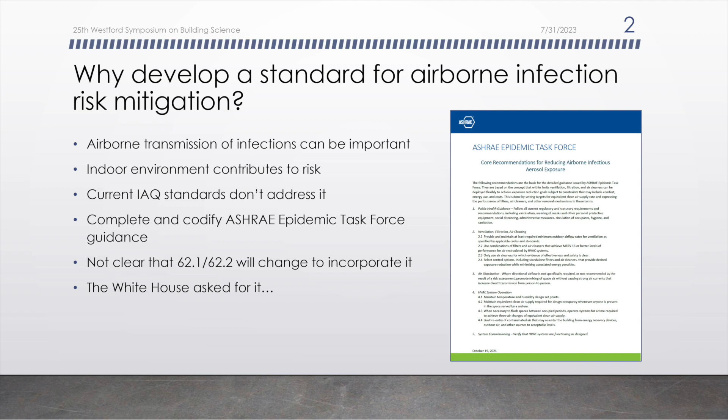events intervened. But so the reasons, airborne transmission of infections is important. We know that now after COVID. I was involved in some of those arguments with WHO through a group that was organized by Lydia Morawska from Australia. We know that the indoor environment contributes to risk of infection, and we don't have standards right now that address it unless we want to point to healthcare standards, and actually they don't do a very good job of it. We've come to learn by studying how their ventilation rates were determined.

In a way, this is the completion and codification of work that we started in the ASHRAE Epidemic Task Force, which I stood up in March of 2020, which now seems a long time ago. We didn't go beyond guidance to things that could be stated as minimum requirements.

And also, speed of ASHRAE. I think anyone's familiar with the ANSI code intended standards like 62.1 and 62.2 for acceptable indoor air quality. They move very slowly, and so it's not clear when or to what extent they might address infection risk mitigation. So that was another reason to do it. Oh yeah, and the White House came to ASHRAE and twisted the president's arm extremely hard to get it done, which was one of the main drivers.

So quick chronology, the White House really started taking notice of buildings and their role in disease transmission late in 2021. This was already getting pretty far into the pandemic. And then by March of 2022, the White House rolled out a program called the Clean Air in Buildings Challenge, which was a voluntary kind of program, but at least gave some visibility to IAQ, and EPA is taking care of that right now.

But then things got very interesting later in the year. I went to a meeting and talked about the need for a national model code for IAQ, and that was what really I was driving for. I spoke about it at a workshop that Johns Hopkins organized next to the White House in September. And then the White House itself had a summit a month later.

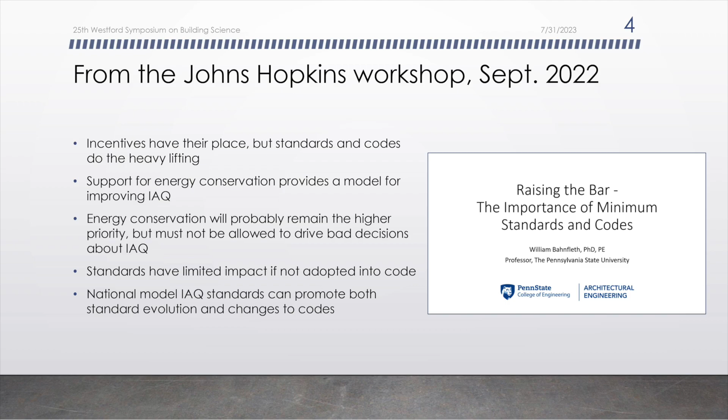These are the main points I made at the Hopkins meeting: incentives are great, like the Clean Air in Buildings Challenge, but a lot of times sticks work better than carrots. With energy conservation, there's good history showing that a national standard adopted into law, like Standard 90.1 for non-residential buildings and the IECC for residential buildings, causes synergies that lead to a lot of progress.

I think energy conservation will remain the higher priority in most people's minds, but we can't allow it to drive bad decisions about IAQ. The buildings are for people, not for saving energy, as Bjarne Olesen, my former ASHRAE presidential colleague, likes to say. Standards need to be adopted into codes if they're going to be effective. So the point was that we ought to be getting some kind of national standard, but I was thinking comprehensively.

In November, the White House came to ASHRAE, and that's when they asked us to develop a national pathogen control standard. I thought that was a great idea until they finished the sentence and said in 6 months. They really wanted it in place by the time the COVID restrictions ended.

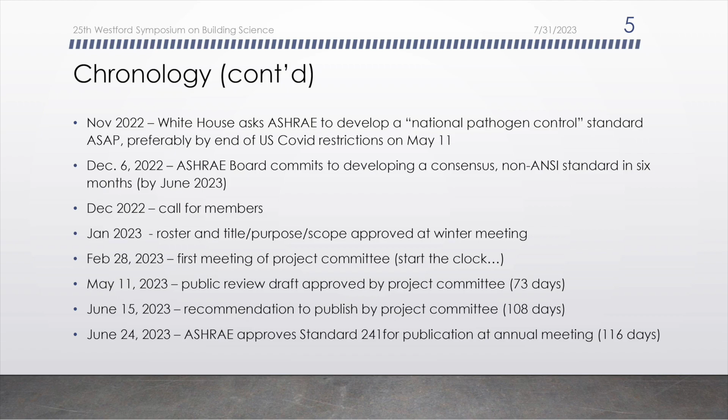I didn't realize that was actually the clock striking 12 for Cinderella, because at the end of that period, not only were the restrictions going to be lifted, but all those folks in the White House who were supporting indoor air quality and COVID response were going away. So they're all back to their other jobs now.

So in December of '22, the ASHRAE board said we'll do it, and we'll do it in 6 months. Then they went looking for someone dumb enough to lead the effort, and I raised my hand one more time. We did a call for members in December. In January, we got a roster approved and a title, purpose, and scope approved at the end of the winter meeting. We first started meeting to discuss the standard with the project committee on February 28th.

We had a review draft by May 11th, 73 days later, did a 2-week public review, addressed 1,000 comments, and voted on a publication draft in the project committee on June 15th, which was approved by the standards committee on June 24th. So it was 116 days of development time, probably 10% of what it normally takes to do a standard. We're very pleased we got it done at all.

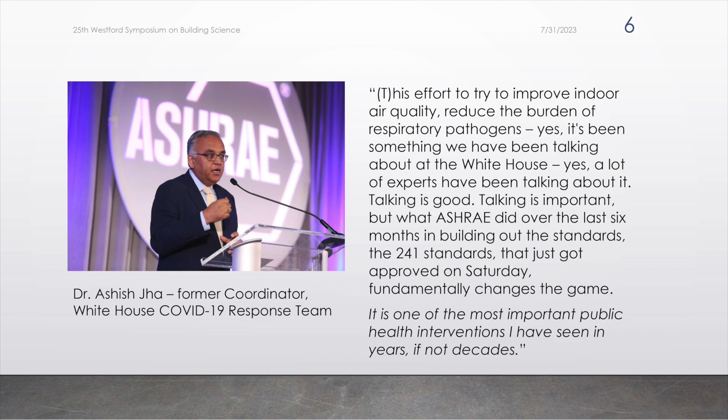We got some nice feedback from Ashish Jha, who came to Tampa for the meeting where the standard was approved. I won't read all of this nice stuff to you, you can find it on the ASHRAE website, but he noted in his remarks that it's one of the most important public health interventions he'd seen in decades. So I think this has the potential to be an important standard if it actually gets used.

Now, the thing that concerns me about all of those standards is that the part that gets adopted into the code is mainly just design and installation. So the operation piece of it is going to be a project for the future.

The way it works is by specifying a requirement we call equivalent clean airflow, which is really a kind of revolutionary concept from the point of view of standards, because instead of simply having standards that talk about outdoor air, we're now combining all of the controls into one metric, and you can achieve that metric by different means, as I'll note.

And because we were only writing one standard, we tried to shoehorn together non-residential, residential, and even healthcare buildings here. Healthcare is all integrated for the most part, and there's one separate section on residential.

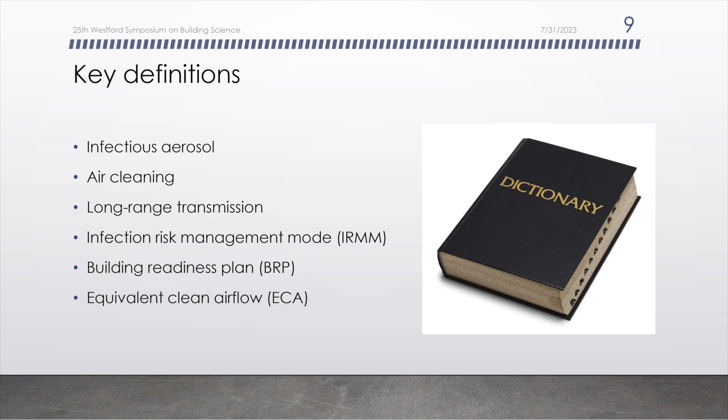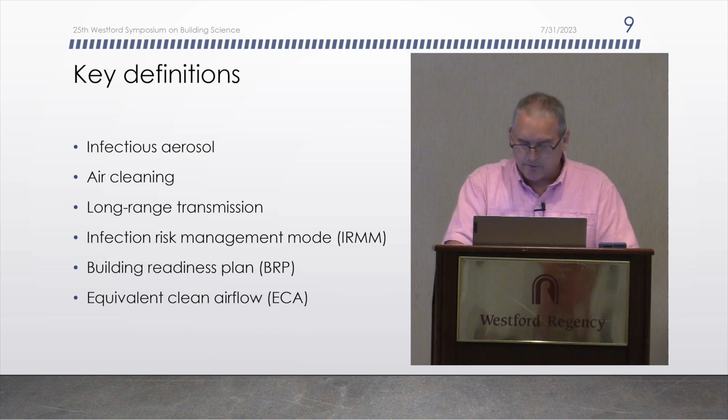So the key definitions I'll talk about a little bit: what is an infectious aerosol? What do we mean by air cleaning in this standard? Long-range transmission, which I've already touched on. Infection risk management mode in a little more detail. And the building readiness plan, which is a really important document that comes out of applying the standard. And finally, equivalent clean airflow, this thing that we want to achieve.

So I won't beat this to death, but again, long-range transmission just means you're not in that radius around an infector where you're likely to get hit by droplet spray or be in their exhaled plume. So probably in the same room, but breathing a concentration of infectious aerosol at the average concentration of the room.

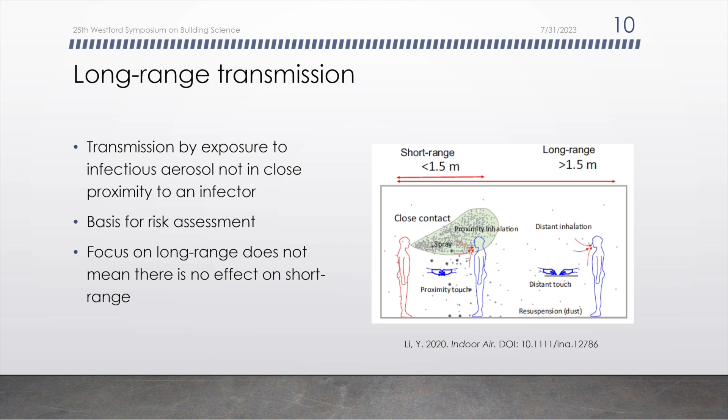So this is what we're really trying to control - those particles - by various means.

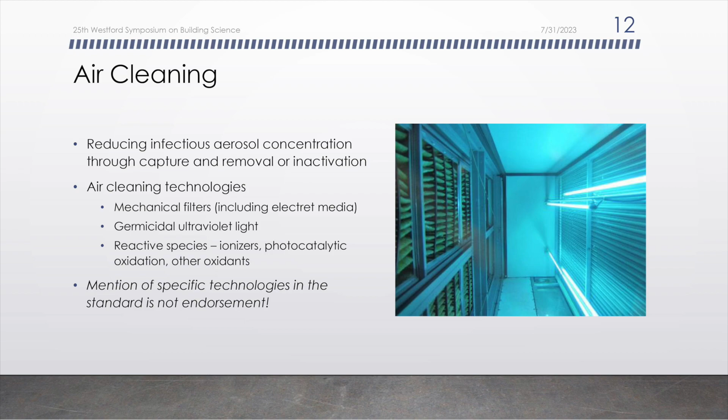Air cleaning is anything we do besides dilution ventilation to reduce concentration. So it can be actually removing particles with some kind of air cleaner, or inactivating them with technologies like the UV you see in the room here. So mechanical filters, germicidal light, and reactive species are all possible ways of complying with this standard.

I think we've gone a lot farther toward defining how that can be done. I want to note that mentioning specific technologies in the standard is not an endorsement - we're simply making it clear what kinds of things we're talking about. There is no ranking of controls in the standard.

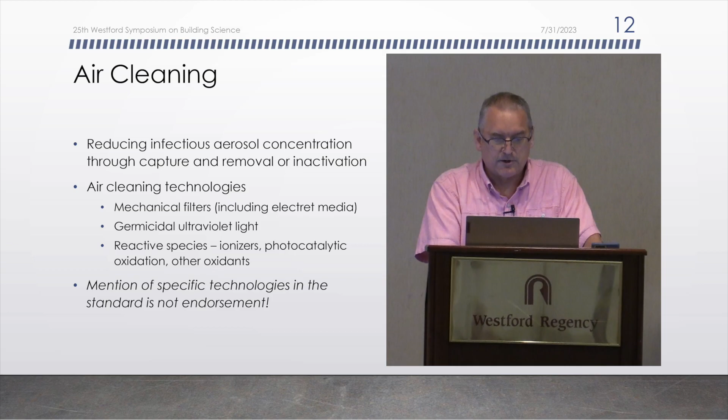So infection risk management mode is a period when there's perceived to be enough risk that we would want to put additional controls in place. That requires a decision maker to make that determination.

It could be a public health official, so it could be something you're compelled to do. It could be a decision an owner makes. It could be the decision an occupant makes if we're talking about individual private homes.

Why not use it all the time? Well, some of the things you might want or need to do take a lot of extra energy, and one of the big issues that came up over and over in the COVID guidance developed between 2020 and 2022 was, isn't that going to really derail my efforts to have an efficient building? So if you have something that's only used intermittently, that helps a lot right off the bat.

And the other thing we might note is that there are huge differences in the level of risk over time. Last year we were here, a lot of people were wearing masks. That's all pretty much gone away, and you see that most people are living what they would consider their normal life without paying a lot of attention to COVID, even though people are still getting it. So those are reasons to have this be a special operating mode.

It's an example, I think, of resilience in design of standards, which is an important concept we need to consider for other things like wildfire smoke - having the capability to respond to some kind of extreme event that hopefully doesn't happen all the time.

So the Building Readiness Plan is a document prepared as the result of assessment and planning, and it documents all the things you're going to do to put the building into status to comply with Standard 241.

And it's a direct descendant of what was called the Building Readiness Plan in the ASHRAE Epidemic Task Force guidance. We've just beefed that up and turned it into enforceable standard language.

But now to equivalent clean airflow, which I think is a really interesting thing. I've given you the whole definition here from the standard: flow rate of pathogen-free air that, if distributed uniformly within the breathing zone, would have the same effect on infectious aerosol concentration as the sum of actual outdoor airflow, filtered airflow, and inactivation of infectious aerosols. So it's kind of a conceptual airflow. If we were lowering concentration by dilution to a certain level with air cleaners or filters, we could replace that with an amount of uncontaminated air that would get to the same concentration. And once we've done that, now we can mix and match.

This is really the key concept of the entire standard, and we have tables there of what's called equivalent clean air for infection risk mitigation. We use those values, which are per-person values, to determine the requirements for spaces by multiplying by the population. And then the task becomes to figure out how best to achieve that target during infection risk management mode.

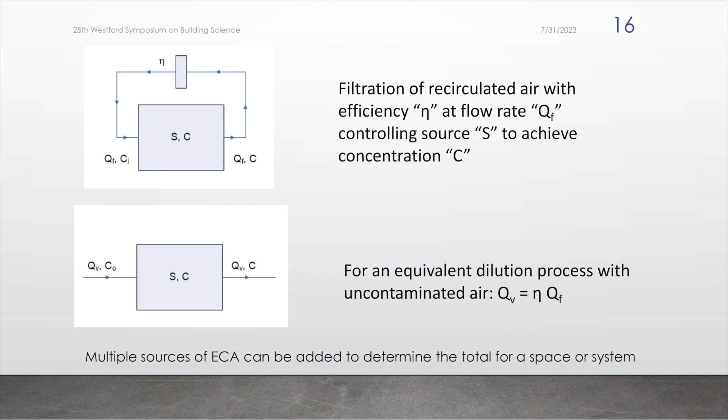We can also imagine that we simply put air with a known concentration of the contaminant C0 through the space and then exhaust an equal volume of air to maintain the same concentration. And we can show that for this case, the equivalent clean airflow is equal to the flow through the filter multiplied by the efficiency of the filter for that contaminant. That's all there is to it. And we can add multiple sources of clean air together to meet the total.

We'll come back to this a bit more later, but let's now, before we go any farther, mention that there are prerequisites here that are important because this is not an indoor air quality standard. So it's built on top of the existing standards—ASHRAE will say 62.1, 62.2, and 170—but it also notes in the details 'or other standard that is approved by the authority having jurisdiction,' because this could be used in other countries, or there might be other reasons for doing that.

So you've got to comply with the standard for ventilation and filtration minimums that you've always complied with. This is what sets the actual minimum outdoor air requirement for a facility that's using 241, and you don't have to exceed that. It's possible to comply with 241 without increasing the outdoor air at all. The only reason you would want to do that is if you determine that that's the most energy efficient and cost effective way, which might depend on your climate.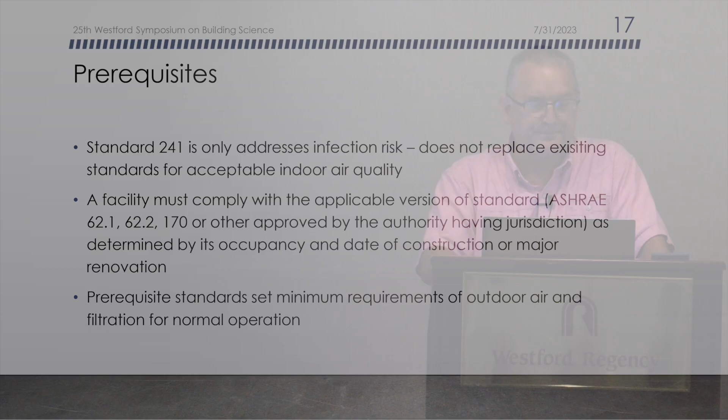All right, so there's a risk assessment that was done to determine these equivalent clean air targets for different types of spaces, and I think this is really totally unique in the standards world. If you go even to standard 170 for healthcare facilities, you find out that those air change rates are largely empirical from the mid-20th century, and that nobody knows what the actual risk is.

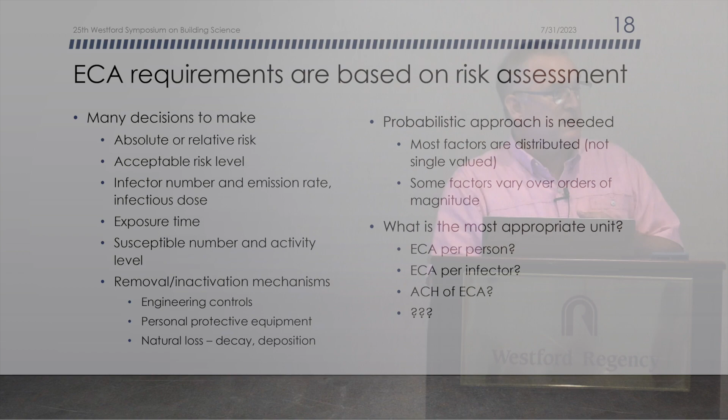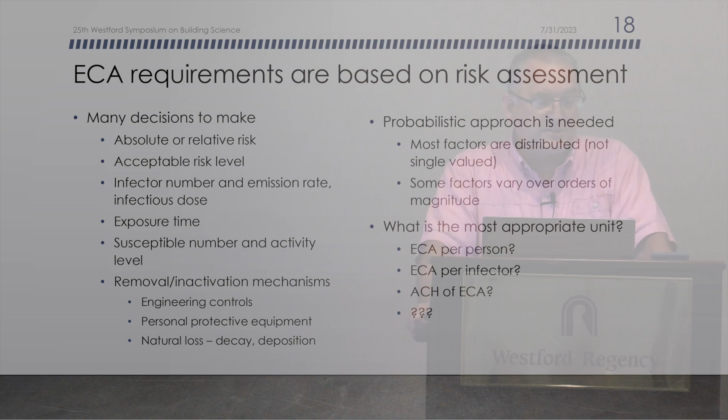You have a lot of decisions to make. When people asked us in the Epidemic Task Force why aren't you putting out ventilation rates, this slide is why. Is it going to be absolute risk or relative risk? Am I going to try to reduce the risk by a certain fraction or to a certain specific level? How many infectors do I assume in the space? Do I assume that there is one there, which is a really stringent requirement, or do I use the population infection rate to determine what the probability is of having an infector there? How long is someone exposed? What is their activity level? And what controls do I assume to do it?

So what you conclude in the end is that you need to use a probabilistic approach. Even if we take infector emission rate, someone has a different emission rate at the beginning of an infection, at their peak of infectivity, and later on. So the rate of emissions varies over orders of magnitude. The method that was used was a Monte Carlo model where these different distributions of important variables were sampled. And then we have to figure out what's the most appropriate unit.

Equivalent clean air per person, per infector, or should we use air changes, ECA, or something else? Unfortunately, everyone grabbed onto air changes because they're in healthcare standards early on in the pandemic, and nobody ever really looked very hard at whether that really made sense.

I'm going to try to clarify why air changes are not a very good metric and why we use equivalent clean air per person instead. There's a tiny amount of math here for those who appreciate math. I'll just try to talk through what this is showing.

The equation at the top left is the Wells-Riley model, which has been used throughout the pandemic for estimating infection risk. The probability of infection, P, can be thought of as representing the number of new infections that will occur for a given number of susceptibles, Ni over Ns. It's a function of how much infectious aerosol is being put into the air, measured in infectious doses: the number of infectors multiplied by the quantum emission rate, and how much air a susceptible person breathes, P times T. Both of those, if larger, increase probability of infection. The equivalent clean air delivery, Q, in the denominator makes it smaller.

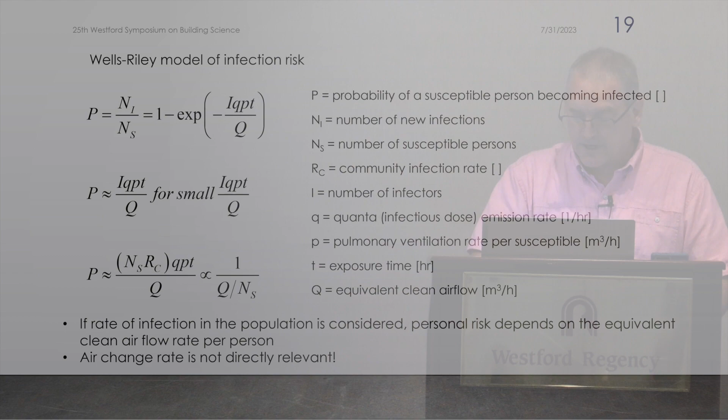If we include the population incidence of infection, the number of infectors in a given space equals the probability in the population, say 1%, 2%, multiplied by the number of people there. So I replace I with the number of susceptibles multiplied by the infection rate. When I do that, I can show that the probability of infection is inversely proportional to the flow rate per person in the space. So this is all to get to P is inversely proportional to Q over Ns. That's why we use that unit, because we want to limit the personal risk to a constant value. Notice that air changes never show up here at all, because they aren't really relevant.

The risk assumptions we used in developing the standard also used the Wells-Riley model, but in a much different way—a statistical sampling approach, with number of infectors as a function of community infection rate. What we did was try to determine clean air flows that would give the same rate of infection, or probability of infection per hour, for any space, which initially caused some really logical questions about: well, your school day is 6 hours long, or I'm at the office for 8 hours, don't you have to figure that out?

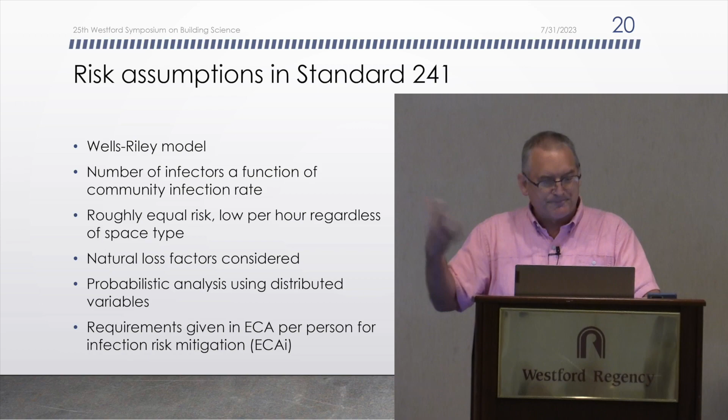The answer is no, and I think this is one of the most brilliant things in this standard: if the risk is the same no matter what kind of space you're in, everyone is somewhere 24 hours a day. So it doesn't matter whether I spent all day in school or all day with my parent at Take Your Kid to Work Day—you have the same probability based on the way we did this analysis. The flow chart on the right, which you can read in the standard yourself, just shows how complex this model was to get to the ECAI values.

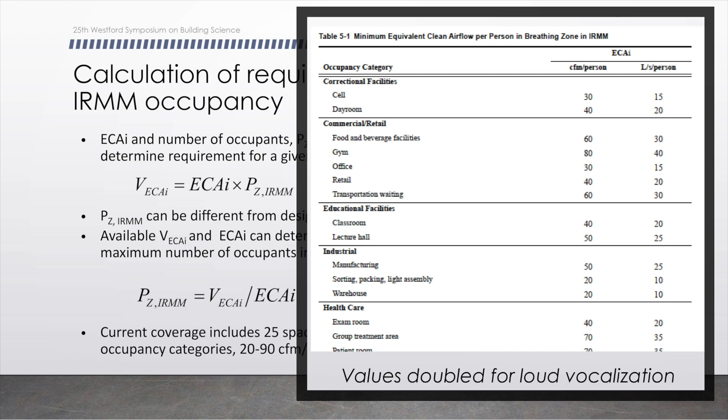So what are the values, and how do we figure out how to design these resilient systems for infection control? There's an excerpt from Table 5.1 on the right, similar to the table in 62.1, that gives you the ventilation rate per person and per unit area. You can see the CFM per person and liters per second per person for different occupancy types there, and they're pretty big numbers. Even with all the assumptions we've made to keep them reasonable, they vary from 20 to 90 CFM per person. You take the appropriate number from that table and multiply it by the population, in infection risk mitigation mode, to get the flow for that space.

I emphasize that because if you don't think you can produce enough clean air for your design population, you have the option, and it's easy to do with the standard in the form it is, to divide whatever clean air you can deliver by the amount per person, and you've now complied with the standard by changing the population. So it's a very flexible method.

Currently, we only have 25 space types and 7 categories. That's something we can work on.

And so if I do that, and divide by the number of occupants in a default space, we get 17, 13, and 10 CFM per person of outdoor air from 62.1 for office, classroom, and restaurant. We've got 30, 40, and 60 in 241.

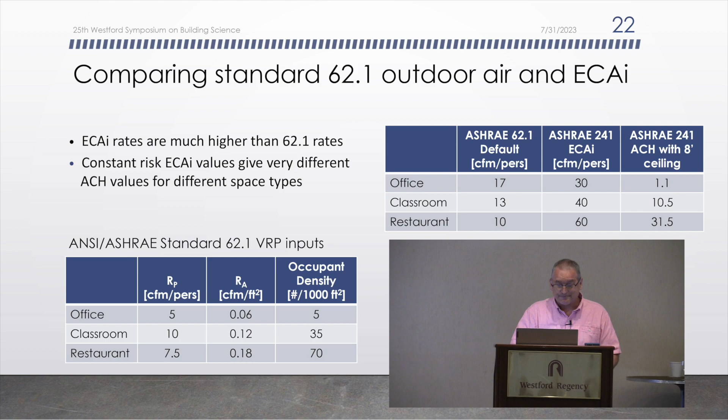All right, so how do we meet the target? We look at what we've already got in a building: ventilation rate, what kind of filters we have, how much recirculation, and figure out how close we are to the target. Then we evaluate different possible changes to get to that point in a way that meets all of our other constraints, cost and energy use, et cetera. So the user has a tremendous amount of flexibility here.

The one limit that we've put in that maybe is kind of controversial is that, first of all, we want MERV-A rated filters. For those familiar with the ASHRAE Standard 52.2 rating system, MERV-A means you've conditioned the filter to take the charge off of it before you test it. The reason for doing that is that people do poor maintenance a lot of the time, and Electret filters, which work quite well when first installed, have the potential in some cases to really lose efficiency, and we just didn't think that was a safe thing to do. But there is a grace period until the beginning of 2025 to do that.

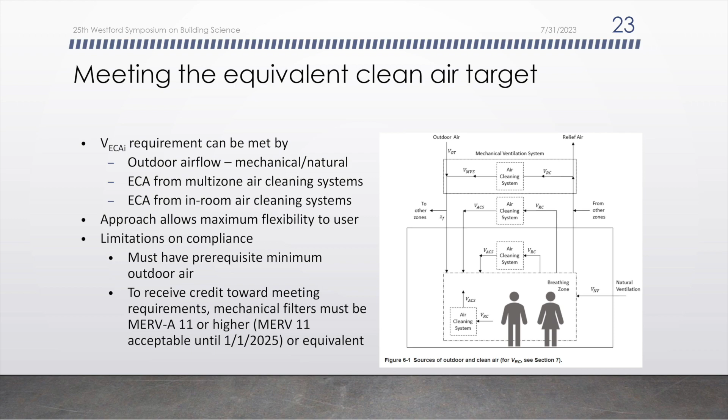The calculations for equivalent clean air do get a little bit complicated. The figure on the right shows all the different places you can have an air cleaning system. There are 4 different distinct ones that result in different kinds of calculations, but we do have a tool to help with that, which I'll mention a little later.

The standard addresses air distribution and natural ventilation, but really not to the extent that we want it to. This surprisingly turned out to be a very hard issue to address. We've got some classification of air cleaning systems, where they're located and what direction the flow discharges, but there really isn't a lot of research around yet to tell you how air cleaners producing the kinds of volumes you'd have to have—if they're, say, fan filter units—interact with the air distribution, whether it's mixing or whether it's stratified. So we've kicked that issue down the road.

We're going to address it in the second version of the standard, but we need to do some work first. So mainly just some guidelines at this point.

As far as natural ventilation, we've referred to what's in Standard 62.1 about natural and mixed mode ventilation requirements, and we didn't do contaminant removal effectiveness or ventilation effectiveness, which really bothers the folks who do air distribution, because we know that's really important—how well air is distributed in the space. But think about it this way: if you go to Standard 62.1 and look for the credit you can take for having displacement ventilation for cooling, you get to reduce your outdoor air because that's supposed to be efficient. We've got UV in this space, and mixing actually makes it work better than displacement by a significant amount. So when we started seeing things like that, we thought, we don't really know what we're doing here and need to drop back and study it a little more.

Really important section of the standard deals with air cleaning system effectiveness and safety. This is a new thing.

Throughout the pandemic, we mostly just said kind of mealy-mouthed things like, we'll only use air cleaners for which evidence of effectiveness and safety is clear, because people were getting sued and we didn't have good tests for these things, and there might not have been evidence that something didn't work, but there wasn't evidence that it worked either. So the requirements here are the start of what I think will be a very useful development.

Effectiveness just means how well a technology removes or inactivates infectious aerosols. Safety, we're concerned about the direct emissions of an air cleaner. Some air cleaners put ions or hydrogen peroxide gas or other oxidants into the air that have health effects at certain concentrations. Also, ozone can be produced by some of these air cleaners. Direct exposure to UV, if it's at too high an intensity, can have health effects. So we have some checks for that as well.

We had to get out in front of the whole air cleaner testing standards world to do that. We'd hoped that some standards under development would be finished, but we just went by them and they're still not out yet. So the standard is technology agnostic as far as air cleaners.

It was our goal to not pick any winners here, but rather to establish requirements that would result in a level playing field. So we use some existing methods of test where they're applicable, like ASHRAE 52.2 for fiber filters, 185.1 as a chamber test for UV, and the two AHAM tests, AC1 and AC5, for portable air cleaners.

We can have air cleaners that are in ducts, classified by single pass efficiency. We have technologies like UV that act in a space, and all you can do is get a clean air delivery rate for them. And then we have mechanical filters, for which we've had standards for a long time.

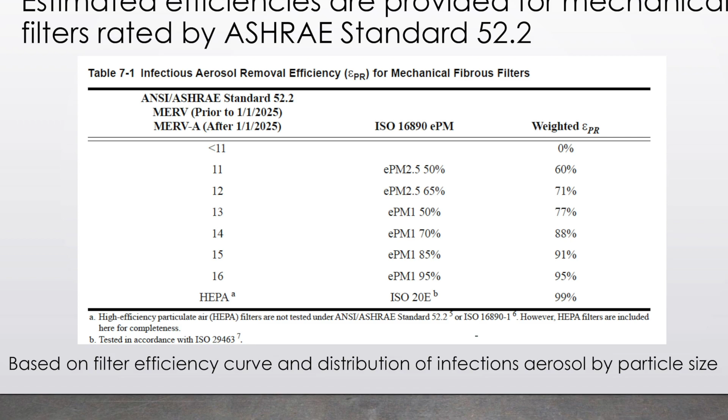That's maybe one of the easiest prescriptive parts of the standard — you can go to a table in 241, and there's a table there by MERV rating of the estimated efficiency for removing infectious aerosol. That puts together the efficiency of the filter and the particle size distribution we looked at before. These are like what was in Epidemic Task Force guidance, but a little more conservative. The values here tend to be a little lower than they were previously.

If you have an air cleaner rated by AHAM AC1, that's a particle test, not an infectious aerosol test. So there's a weighted average equation you use to account for that. It averages out smoke, dust, and pollen at 30%, 30%, 40%.

Safety — we're just dipping our toe in the water here. There can be many different things in the air and lots of chemicals produced by chemical reaction. The ones we're mainly concerned about are ozone, formaldehyde, and particles, and that's in part because those are contaminants we know are not only prevalent but quite harmful. So we're trying to get a small list that might actually be measurable in a practical sense.

Fan noise isn't actually regulated within the standard, but it has to be reported. This came up a lot in the pandemic when people were making Corsi-Rosenthal boxes using cheap box fans that maybe were 70, 80 dB on their high setting. So it at least has to be reported, so that when you buy an air cleaner, you have some idea whether you're going to be able to run it on the high fan speed.

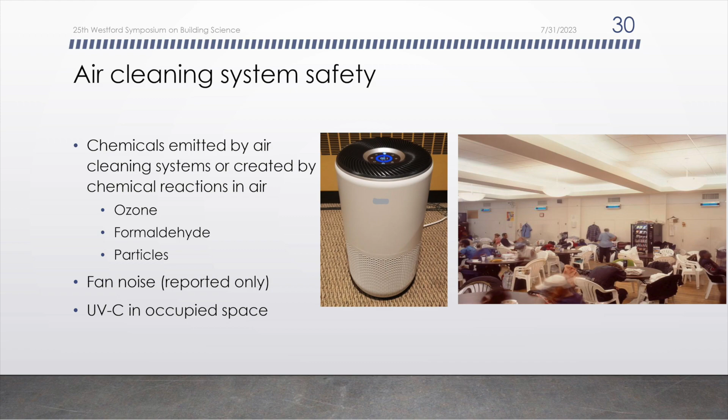And UV in the occupied space needs to be measured. As it was here, I can report, and you're all safe. Bill Palmer will back me up on that.

All right, so that's most of the technical requirements. I want to say just a little bit about assessment, planning, and implementation.

This is what gets into the building readiness plan, and as I said, it comes out of some of our earlier guidance. The big picture is it's applying commissioning, retro-commissioning procedures to systems that control infectious aerosols, and it culminates in the development of this plan. It also includes methodologies for assessing the requirement for additional clean air.

There's a lot of supporting tools here: an appendix that describes tracer particle tests to do in-place measurement of clean air delivery, checklists for items that should be commissioned, a template for developing a building readiness plan, and a calculator that's the descendant of the equivalent outdoor air calculator from the Epidemic Task Force. This is a spreadsheet you can use to calculate those numbers, and some other items of guidance.

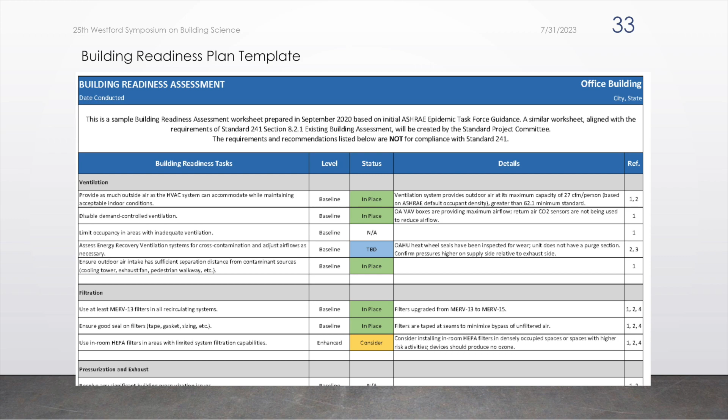This is the first page, or part of the first page, of the Building Readiness Plan template. Very easy to use, and it doesn't have to be a long document, just enough to meet your needs.

This is a sheet from the equivalent clean air calculator. The blue items are from menus, so if you picked office, it would say 30 CFM per person ECA. You put in the values for your space, and eventually it will tell you what CFM per person you actually have and whether it passes or fails.

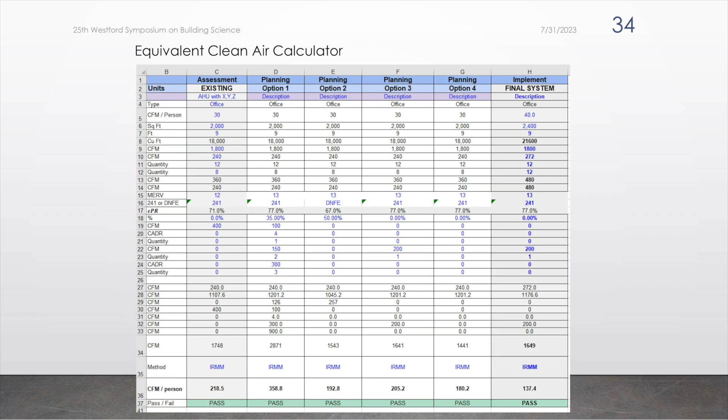The section on operations deals with a number of important things, like keeping your building readiness plan on site, accessible, and current, and stocking supplies. Remember what happened when everyone needed more efficient filters at the beginning of the pandemic - they weren't to be found. Masks, for that matter, as well. I got my first batch of masks in 2020 from a friend in Beijing, which it turns out is where a lot of them are made. There's a real supply chain problem there because all of that had been sent out of the country.

There are three operating modes that need to be defined: normal (occupied, non-occupied), infection risk management mode (occupied, non-occupied), and temporary shutdown. We've stuck with the statement that temperature and humidity set points should be maintained at design levels when occupied. There are requirements about occupancy schedules - basically, when there are people in the building, you have to be meeting the requirements of the standard.

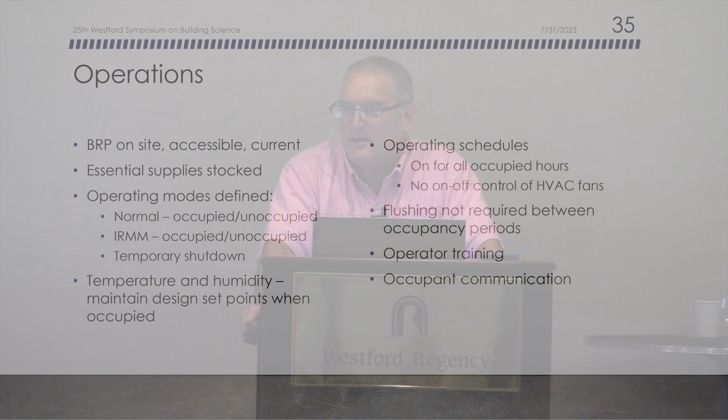Because you will often lose a lot of air cleaning if the fan cycles off, if you're relying on the filters in your air handling unit, you can't have on-off control during this mode of operation either. And there are requirements for operator training and communication with occupants.

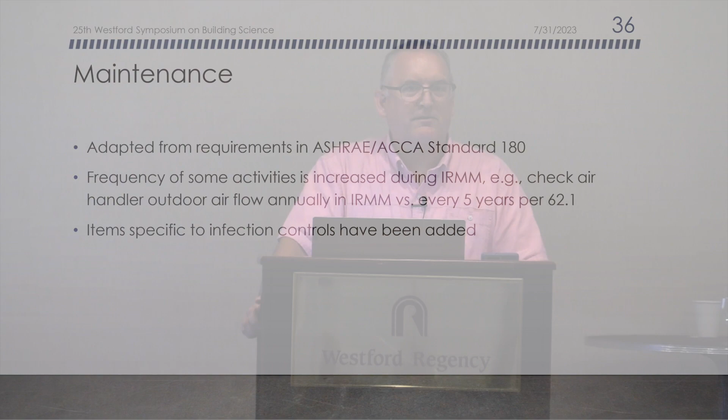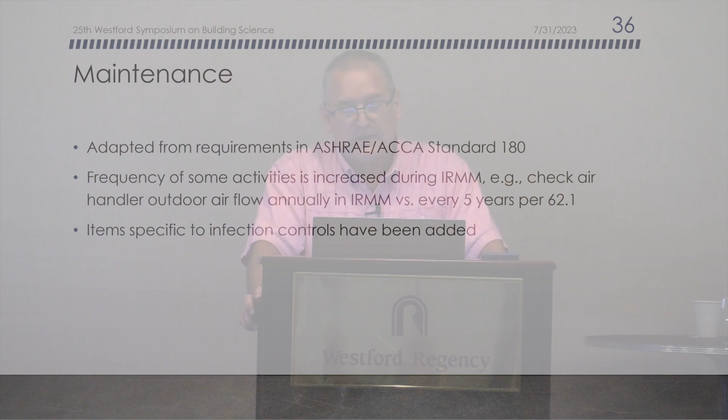Maintenance items are taken from ASHRAE ACCA Standard 180. We've stated them again - of course, nobody's really enforcing them in most buildings, but they are now there. The main difference between 180 and 241 is that some items, like checking your outdoor airflow, have to be done more often: every year instead of every 5 years.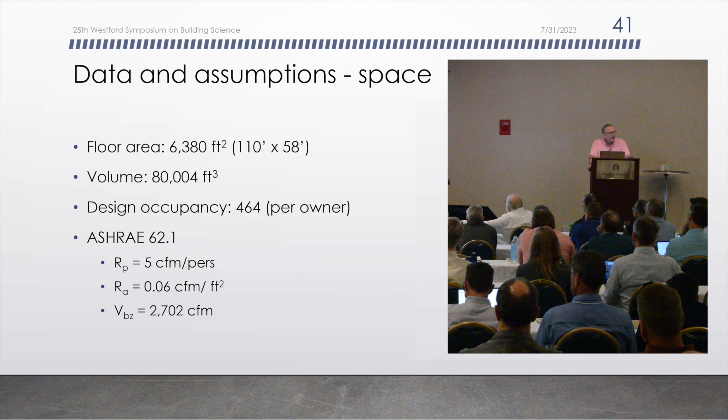From ASHRAE Standard 62.1, if we assume a general purpose meeting room at a conference center, that's 5 CFM per person and 0.06 CFM per square foot, giving us a breathing zone ventilation requirement of 2,700. We have 3 rooftop units here, and I trust the outdoor air intakes are open this year—we found that was a problem last time. They've been retrofitted with MERV 13 filters, which per the table I showed you is 70% efficient, and we were guesstimating the supply air flow rate.

At 14,400 CFM. Lew Harriman, who unfortunately couldn't be here, did a lot of the groundwork on this, and I want to give him a shout out—sorry he's not with us this time. The outdoor air is 2,880, so it complies with 62.1, and we have 11,520 CFM of recirculated air that can go through those MERV 13 filters.

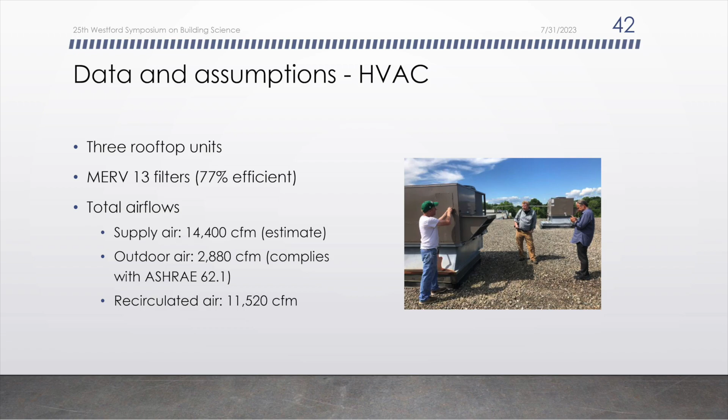To analyze now relative to 241, if we assume an auditorium being the closest space type, that's 50 CFM per person. With 464 occupants, that's 23,200 CFM of equivalent clean air. What do we have in the existing system? 2,880 outdoor air and 8,870 CFM of filtered recirculated air, for a total of 11,750. So we're pretty far short here—we need another 11,450, or we reduce the occupancy to 235.

We could do that, Joe, but I don't want to pick. So what could we do to make things better to get that additional 11,450? 100% outdoor air won't help unless we replace the air handling unit, so that's not a good idea. When you have a recirculating system and increase the percentage of outdoor air, you just reduce the amount of recirculation—it's almost a zero-sum game. If we increase the filter efficiency all the way up to HEPA, it would get us to the same place, 14,400. So we need to do something else.

In-room air cleaners could help. You see some Corsi-Rosenthal boxes around here, but it takes a lot of box fans to get 11,000 CFM—I think we're a little bit short of that. So really about the only thing that seems practical is something like upper room UV, which we've got again here.

A 254 nanometer system. If we look at the sizing of a system like that, we need 0.012 watts per cubic meter of UV power to get 20 air changes per hour of equivalent removal for tuberculosis, which is actually a pretty tough bug. Viruses like influenza and SARS-CoV-2 are much more susceptible. That worked out to a little under 22 watts of UV output power, and with open fixtures, the ones without louvers, you could probably do that for as little as 24 watts in here. So from the energy impact point of view, it's really quite small.

And at 20 air changes per hour, that would be 25,000 CFM roughly of additional equivalent clean air, which is a lot more than we need, so that system could actually be downsized.

Air cleaners could work, but I looked up some numbers and you're floating around 0.1 watts per CFM for peak fan power for a portable air cleaner. So we're talking about another kilowatt of plug load in here if you were going to get 11,000 CFM that way.

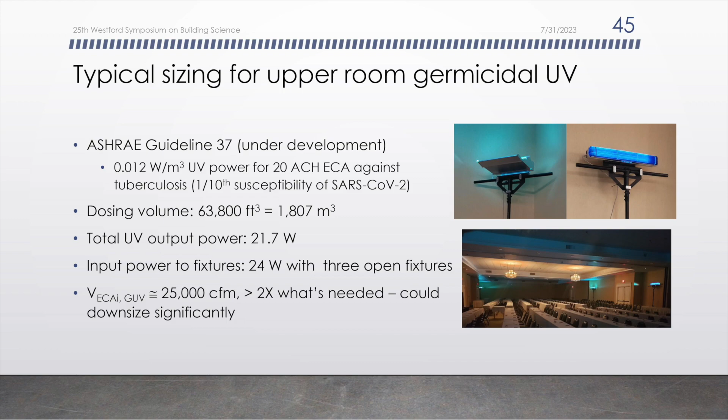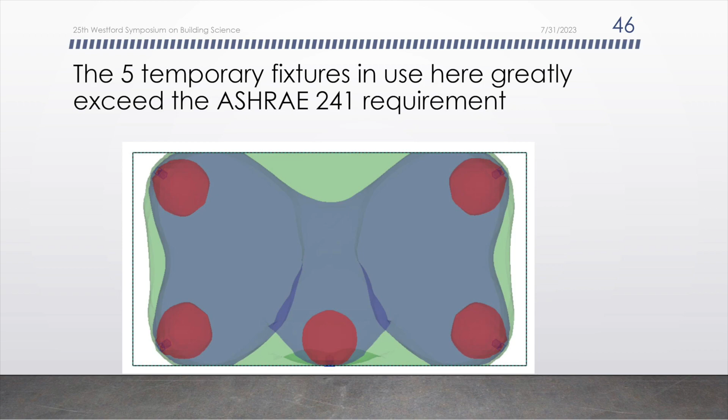Just to give you a refresher on how the system works here, this is a plan view, and we've got 5 fixtures, the 1 across the back is on the bottom, and then the 4 in the corners. The blue here shows where we really have good coverage. This has all been checked out by our friends who do UV.

So, I have one question. Let us imagine that above this room is 14 more stories. Would those numbers change or not? Oh, yeah, what we were looking at in my example was the number for just this space, right? So that was for this space. If we had another ballroom above this one, that's another 20,000 CFM for that space.

In my previous life, I was a pulmonary physician. One thing I want to do is commend you for your effort. You were given an impossible task because I think you were asked to do something that you really couldn't provide the answer to. Part of that is, I think this may be the only standard I'm aware of where there's no easy way to measure what it is you want to control, unless there's a surrogate that's been found for the COVID virus in an aerosol form to have any idea of what the concentration is in any point in a room for what you want to control.